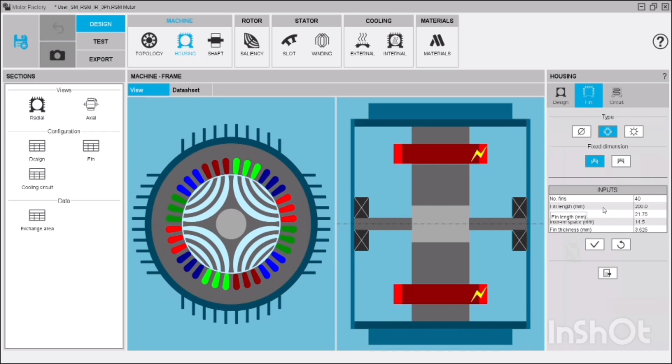And coming to the housing part, first in design, I have chosen a circular type and given various dimensions for this. Like frame thickness I have given 10 mm and coming to fins I have given parallel type of fins and set the different dimensions like number of fins and fin length, fin height and interfin space and also fin thickness.

And coming to the shaft part, in shaft part I have given the dimensions for the shaft and here I have used the bearings for the mechanical support. And for the bearings also I have defined this with different types of dimensions for length, width and all the dimensions I have given here.

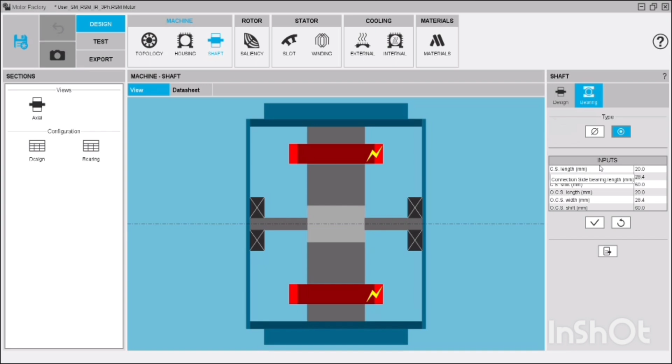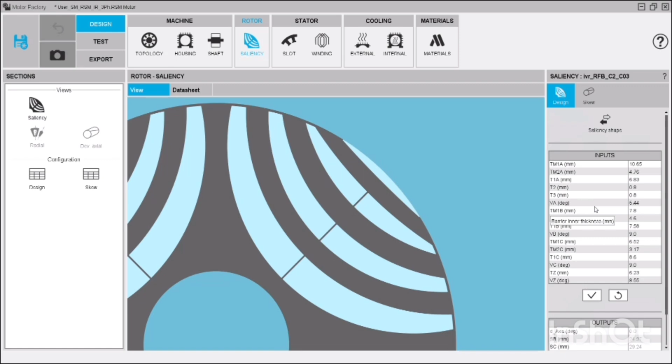And for the saliency type, this is the saliency shape I have chosen. We can see over here and I have given various dimensions like barrier inner thickness, outer thickness and all the dimensions we can see over here. And coming to the slot part,

these are the slots. And in winding I have chosen star connection and the number of parallel paths is 1. And for the coils I have chosen circular type and the number of turns per coil is 8 and the number of wires in hand are 14 and the wire diameter is 1.024 mm and inter wire space is 0.01 and these are all the dimensions I have chosen here.

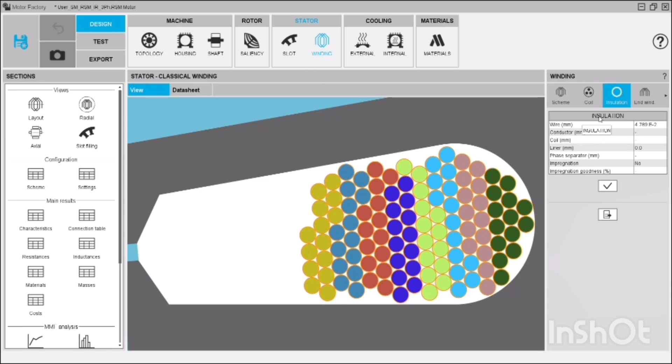We can see the diagram over here. And then for insulation I have given this and for end winding I have chosen U shape. And these are all the values I have chosen.

And coming to cooling part, for the external cooling I have chosen the convection mode as forced and we can see over here the fan tip speed ratio, altitude, flow origin and the machine orientation. And for the internal cooling I have chosen convection mode as natural.

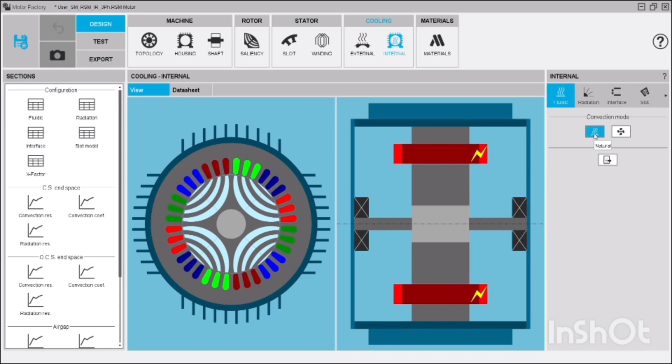And coming to the material part, for frame I have chosen aluminium and for the magnetic circuit I have chosen this. For coil conductor copper and for the insulators Nomex. And for the cooling, for internal fluid I have chosen air and for the external fluid also air.

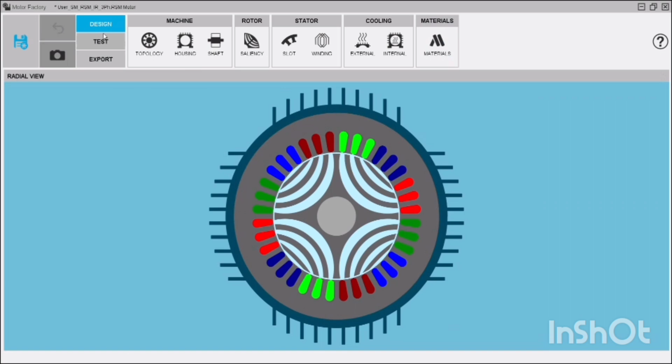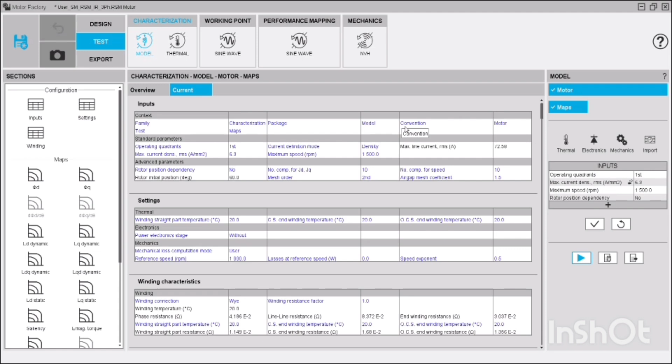And coming to the testing part, here we can view our RSM motor based on all these designing parts. Coming to test, there are different types of tests and we have to perform various tests for this motor. First we are having characterization model. For this I have given the values, and here we'll get the inputs and the winding characteristics and various graphs we can see over here.

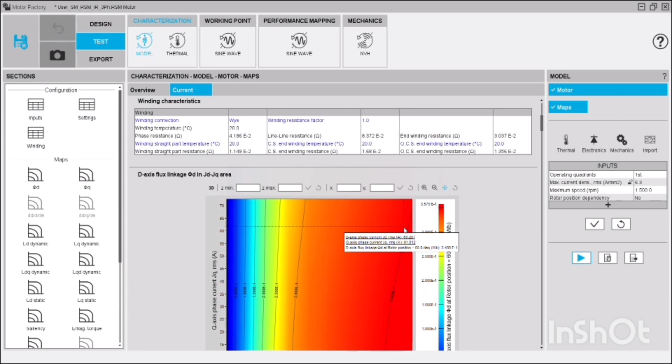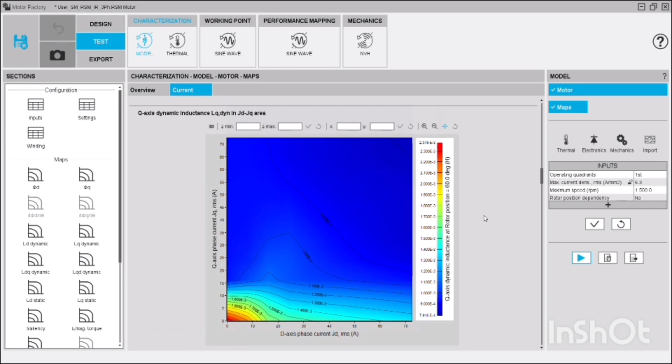We have various graphs here, like q-axis dynamic inductance and all the graphs over here. Electromagnetic torque and stator iron losses. These are the various graphs we get.

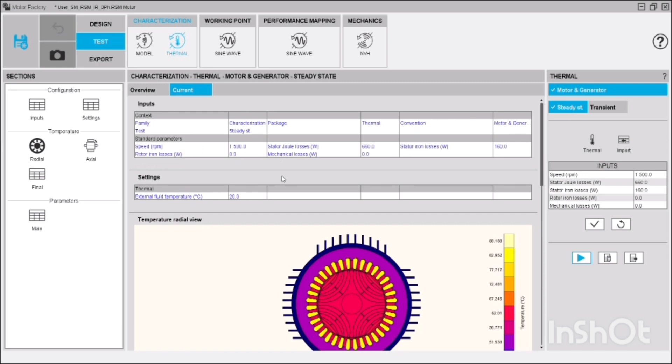And coming to the thermal, we can see the temperature radial view here, and external fluid temperature and all the inputs we can see here, like the speed, 1500 rpm we can see here. This is temperature radial view and axial view.

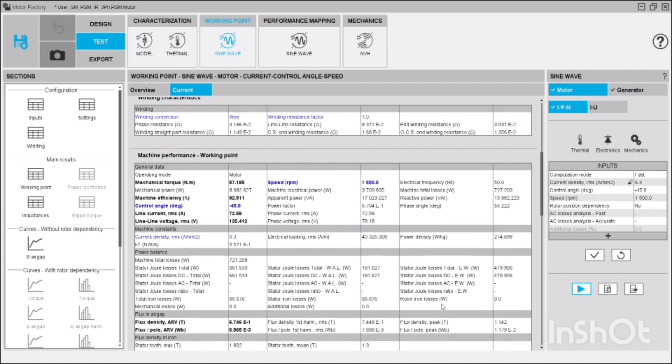And coming to working point sine wave, here we are having winding characteristics, and also we got the efficiency of 92.511, and line current, line voltage, we got all the various values we can see over here. And the graphs, flux density in air gap versus mechanical angle, here we can see the graph.

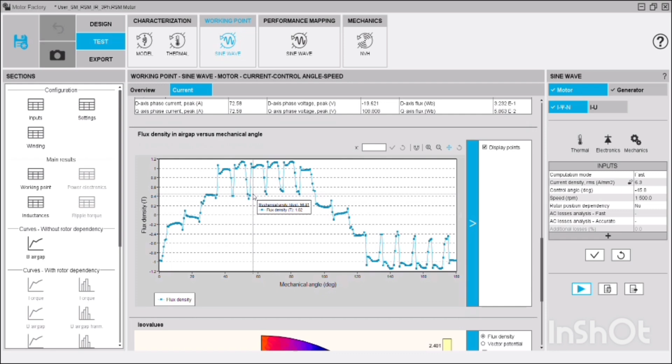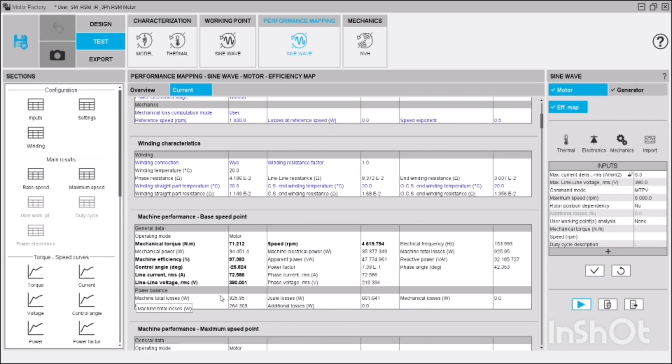And coming to performance mapping, here also we can see the various standard parameters like current definition mode, max line voltage and additional losses, and the winding characteristics, winding temperature, and the machine performance like operating mode, and the mechanical torque, power, and machine efficiency I got here is 97.383. And we can see the machine performance, maximum speed point, and there are graphs like mechanical torque versus speed.

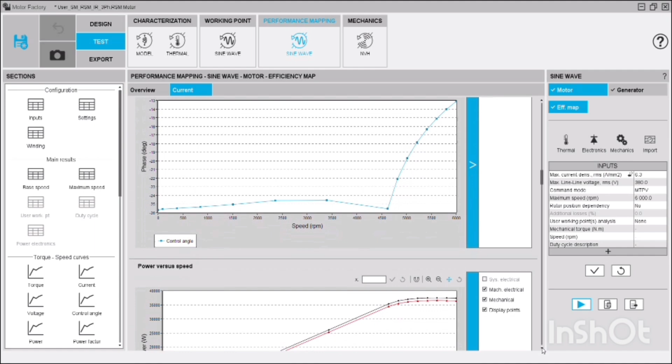Current versus speed graph, and voltage versus speed. These are the various graphs we can view here.

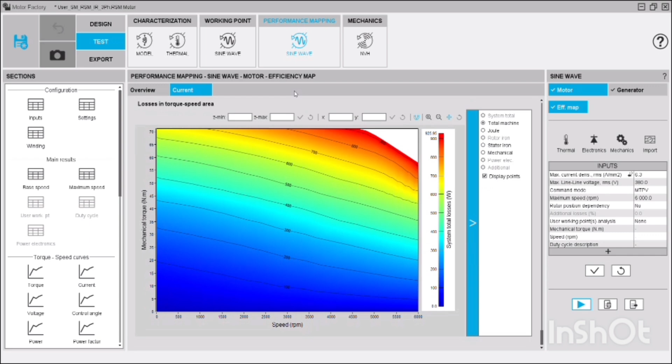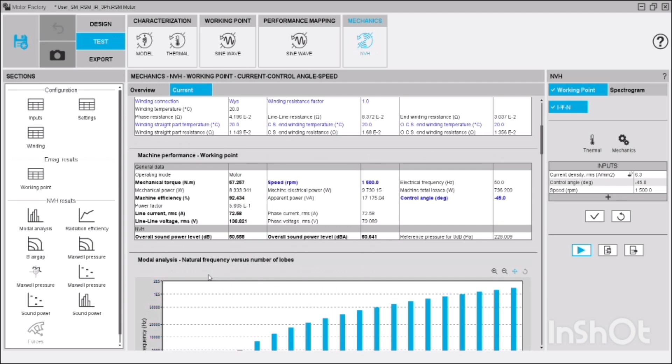And coming to mechanics, here we can see various inputs and winding characteristics and the efficiency, mechanical torque, and overall sound power level. And here we can see the modal analysis like natural frequency versus number of lobes, and the radiation efficiency.

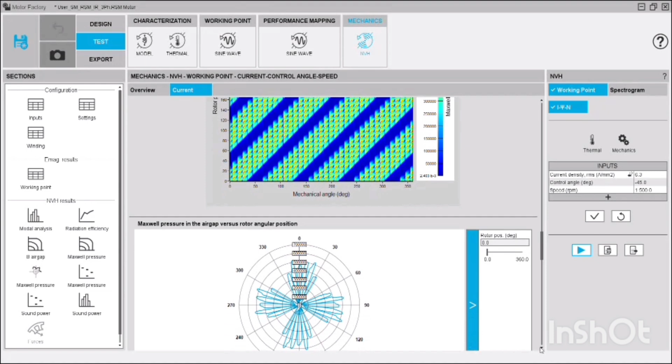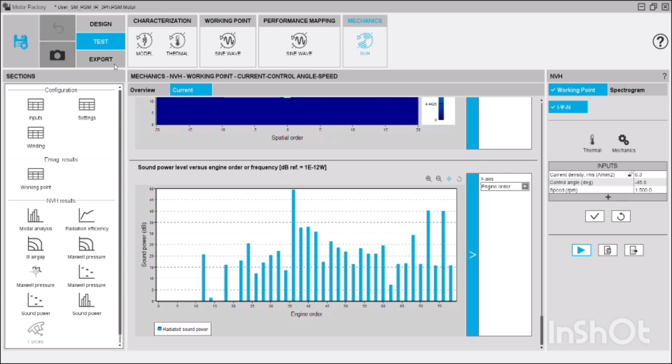These are the various graphs we can view here for the mechanics part. So we have tested for the characterization model and thermal, and working point sine wave, and performance mapping sine wave, and the mechanics NVH. After testing we have to export it to Flux 2D, and we will get a report. So we'll get a report here.

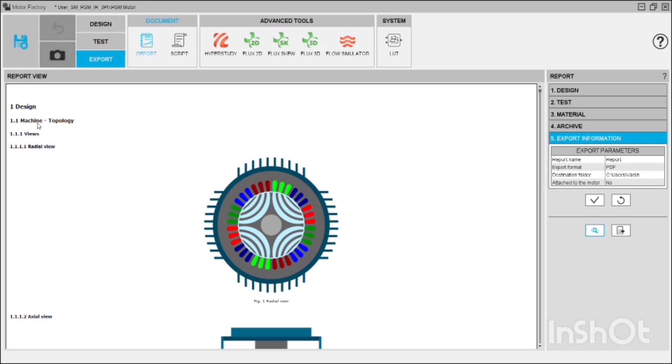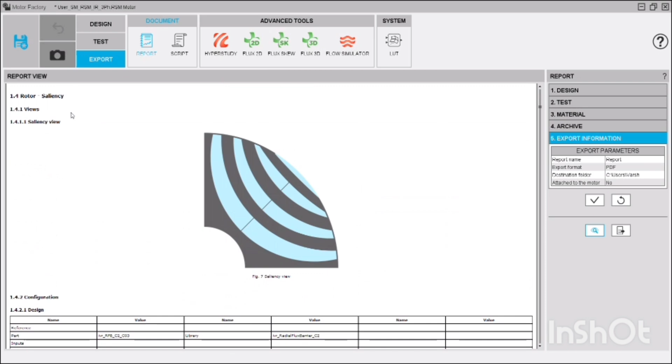So based on our design and testing part, in design we'll get the radial view and axial view. This is winding view and all the configurations that we have given the values for the outer diameter, inner diameter, all the chosen values we'll get here. This is rotor saliency and stator slot. So all the given values we can see in this report file.

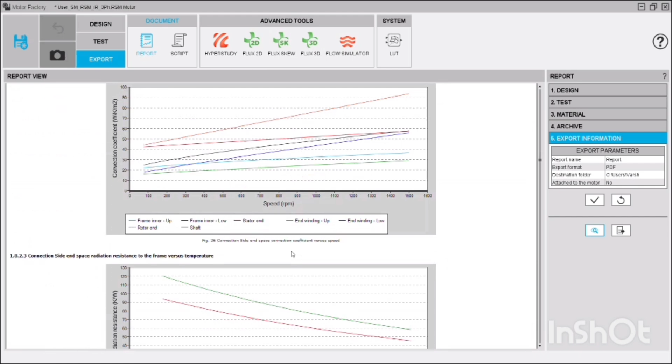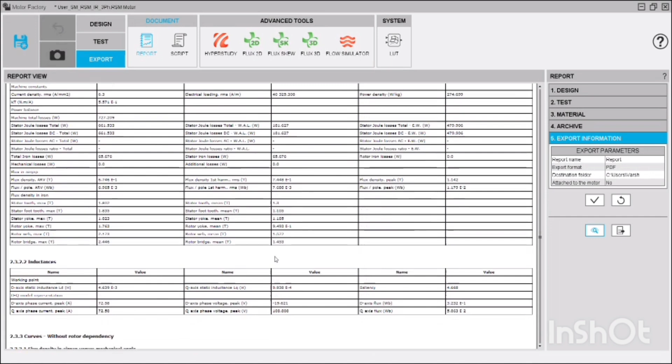You can see over here various graphs in this file that we have got in the testing part, and also various configurations like we have seen in the testing part, and so we'll get a report based on all the testing of our motor.

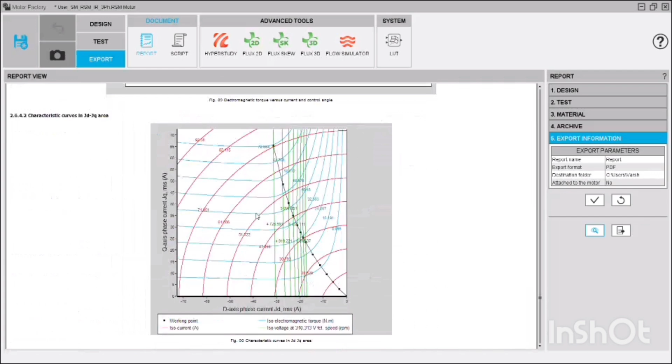Then we have to export it to Flux 2D. So this is another type of knowing the efficiency of the motor. We have exported into Flux 2D.

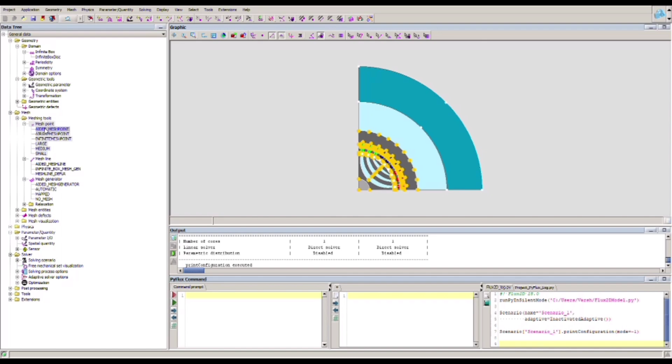Here we can see different parameters like meshing tools, aided mesh point, air gap mesh point, infinite mesh point, and also mesh line, aided mesh line, infinite box mesh generator. These are all the parameters we have given in the Flux 2D. So we can see aided mesh points here, and these are all the values.

And in the solving scenario, we can save our file. flux2d.flu. This is our saved project.

So finally I have designed a reluctance synchronous motor using Altair Flux Motor, and thank you for giving me this opportunity.